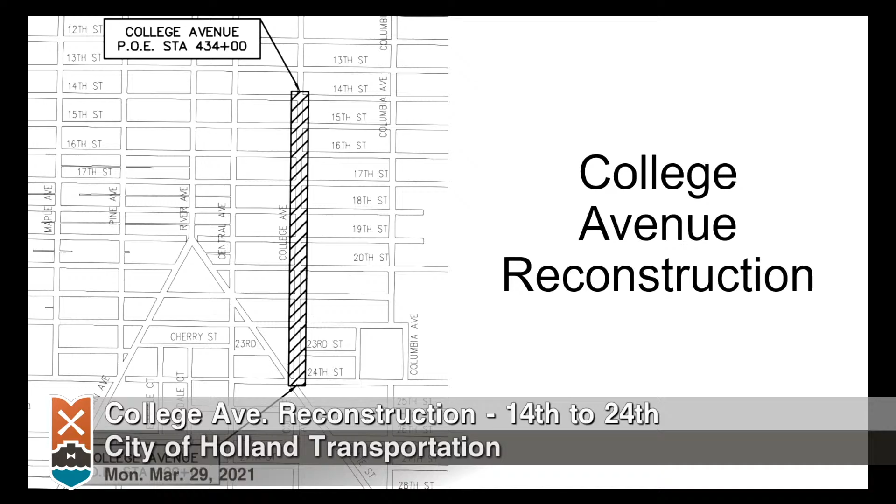So basically our project here is College Avenue. You can see in the PowerPoint, it's from 24th Street up to 14th Street, which is about a 3,400 foot stretch, about 0.6 of a mile. Residential roadway, 25 to 30 mile an hour speed limit, about a 31 foot wide cross section. Hasn't been touched in quite a few years. It's a very tired road. Maybe 20 years, give or take, since the last time it's been overlaid.

And the last time it was overlaid, the gutter pan was overlaid along with it. And the storm sewer, the storm infrastructure on this road is older infrastructure. It's a lot of clay tile, 8-inch, 10-inch, non-reinforced concrete type pipe. It's old stuff. We're going to upgrade it with this project to a much greater extent so that it can handle a lot more water and it'll last a lot longer than so far what it has.

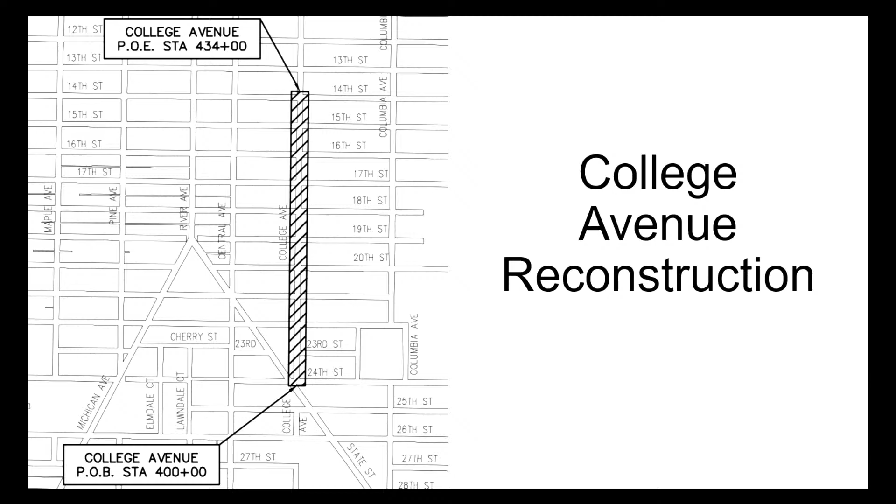Again, my name is Eric Thorne, and I'm a project engineer with the City of Holland.

A lot of things to consider with this project include the project schedule. We're opening bids tomorrow on this project. It's already been bidded, contractors have it in their hands. We will open those tomorrow, pray for low bids, and hopefully a couple weeks, 3 weeks after that, we will hopefully by mid to late April get the project rolling. The project will start, and I'll talk about it more in a minute. It'll go from the north side, 14th Street, south towards 24th Street. It'll be phased in 2 different phases, and I'll get to that in a minute.

Trash pickup during work, we typically implore you to label your trash can with your address so that the contractor, if the road's torn up and needs to pick up your trash can and move it somewhere else for the trash service to handle, can put it back in the right spot. We ask you to label it. You don't have to move it anywhere separate or different, just put it to the end of your driveway, and the contractor will handle that. The way I understand it, north of 18th Street trash pickup day is Monday, south of 18th is Tuesday, and we will coordinate that with the contractor.

And then mail delivery, I believe it's all on foot on College, so that should go uninterrupted.

And then tree removals and replacements, we have had Bartlett, a professional tree service, go through and look at every tree adjacent to College Avenue. They've assessed whether they're in good condition, fair condition, or bad condition, whether they need to come out or not. I have a whole spreadsheet of ages and diameters and the whole nine yards.

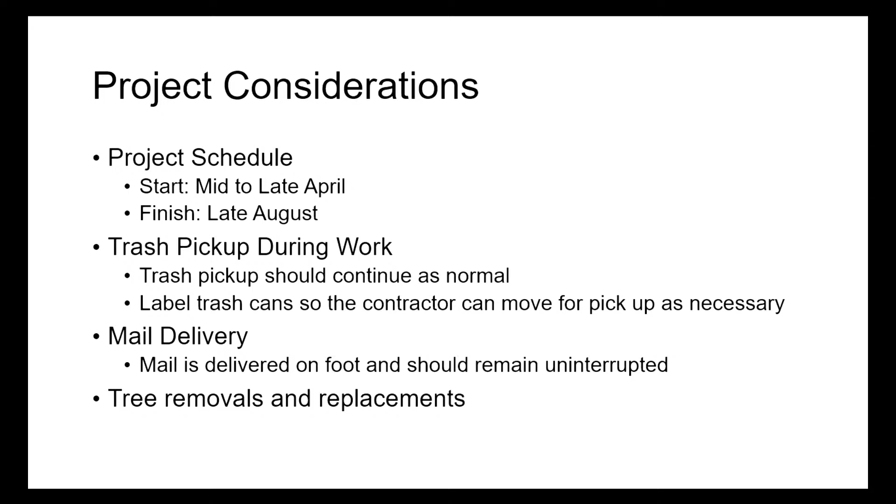So the only trees coming out, if any, as of right now, are trees that are essentially dead or dying. They've all been assessed by this professional, and they're coming out because that's their condition. Most of them, except for maybe one or two, aren't coming out because we want them to or need them to.

They're only going out because they are in very bad condition. So for our phasing here, it'll be completed in 2 phases. The first phase will be from 14th Street down to 19th Street. It's important to note that we are not doing anything inside 16th Street, so it will flow just like it should any other time and will never be closed off. This phase 1 will actually be split into 2 phases: north of 16th and south of 16th.

This should start before 10th Street construction starts. During the first part of 10th Street construction, it's my understanding that the College Avenue intersection at 10th Street will be open anyway, so hopefully this has minimal impact with that project. That is the intention of starting at 14th Street, to get out of the way of that project as soon as possible.

And so for the second phase, the first phase ends at 19th Street. There's a half block, 19th north to 18th and 19th south to 20th Street, that was reconstructed a few years ago and will not be touched with this project. So on 19th Street, you'll be able to flow through - it will not be closed.

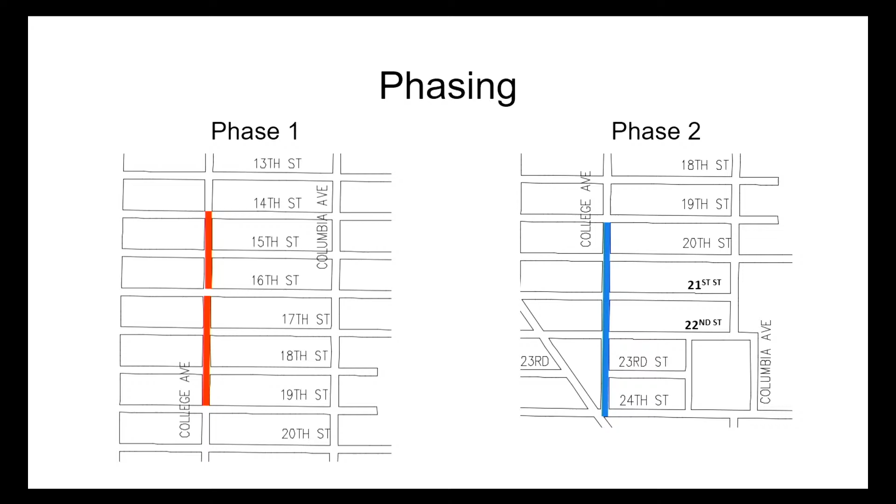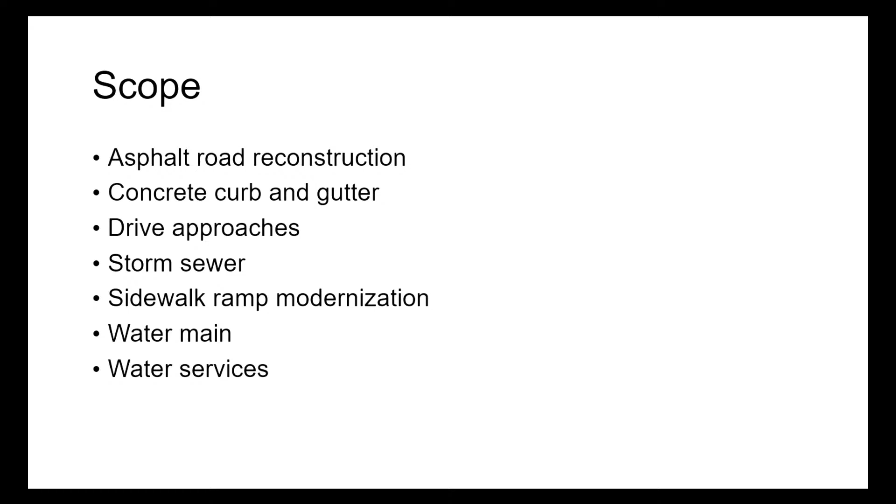So the scope of this project, I think I've touched on it a little bit. It's a full asphalt road reconstruction. You're going to essentially get the same profile cross-section that you have now, about 31 feet wide. But that means the whole road's coming out - the grade, the sub-base is coming out. They're getting all new aggregate base.

New curb and gutter - like I said, the curb and gutter that's there now has been overlaid with asphalt, so that's going to be poured, all new brand new curb and gutter. New drive approaches too - the public side drive approaches from sidewalk to sidewalk adjacent to the road are all going to get ripped out and replaced.

Storm sewer wholesale is going to get redone. There are some spots like around 19th Street that were redone a few years ago that will be tied into with this. 16th Street will be tied into since we won't be doing anything inside it, and we're tying into up by 14th Street - that's all newer reconstruction from the last several years that we'll be tying into.

As part of this, we'll also be doing sidewalk ramp modernization. Basically, a lot of the sidewalk ramps out there are decades old and don't conform to current ADA standards. Current ADA standards require a flat landing for a wheelchair and the detectable warning plate with domes. So all the ones that aren't compliant - which outside of 19th Street and 16th Street, I don't think there are any compliant ones out there right now - those all get redone.

Water main's getting redone, and with the water main comes the water services nowadays, and Mark will talk more about that in a few minutes.

So that storm sewer on the west side of the road is all coming out, and we're putting in an 18-inch centerline main. A lot of the stuff's getting upgraded from 8-inch storm to 18-inch storm, which is quite an upgrade. We're tearing out all the storm structures and putting in new precast concrete storm structures. Some of what's out there now are actually brick structures - it's all old material, falling apart, with patches over the years.

If you look at 23rd, it might be easier to look over here. A lot of this main line storm is going to tie into some of these side streets. Where we're leaving 22nd Street, we're leaving a stub for future expansion. So if we do a similar project on 22nd Street in the future, you won't be stuck with what looks like an 8-inch clay tile storm - we'll replace it with either an 18-inch or 12-inch reinforced concrete pipe. So part of this project isn't just improving College Avenue, it's allowing for improvement on future roads and future projects.

This is just going up the road towards the north. We're leaving stubs again on 21st Street on either side. And under each driveway - this will be a point I emphasize later - we're putting PVC sleeves. So if you have sump pumps or sprinkling lines in the future that need to get under concrete driveways, you're not tearing up your concrete driveway to put those in. That's the goal of putting those under there.

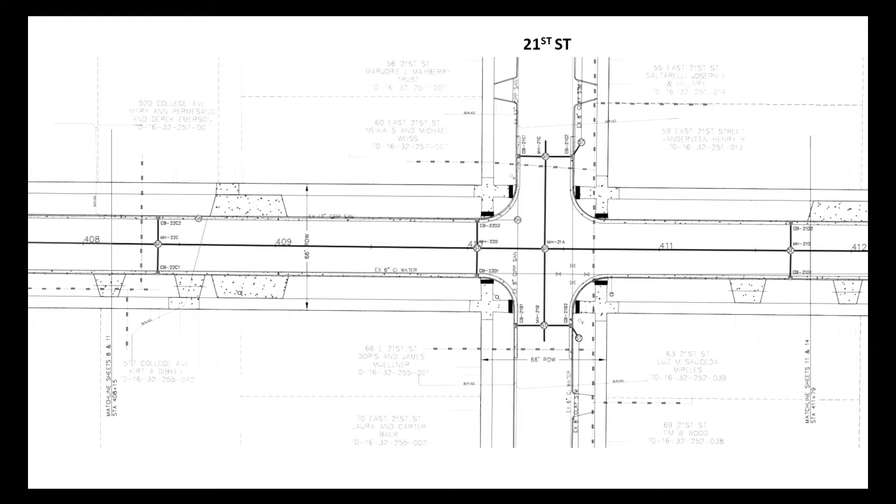If you need to put your sump pump line through there, all sump pump lines need to be connected to the back of a storm structure. They can't do what we call a blind tap - they can't just penetrate straight into the storm sewer. They have to go into an access point, which is a storm structure. The reason we do that is for maintenance. If there's ever an issue with your line, we want to be able to put a camera in it and access it to fix it. It's much easier that way.

It's better, and it's going to do less damage to our own system if it does need repair in the future. So every driveway we put in, and a lot of sidewalk ramps, will have these PVC pipes for sprinkling lines or your sump pump.

Continuing up here to the north, we're at the park on the right side, or the bottom of your screen. More of the same, really - again, not going to get into the minutia.

If you do have questions or want to see something specific, I have a plan set. I'm sitting up here, so I can talk to you afterward. It would make a lot more sense that way.

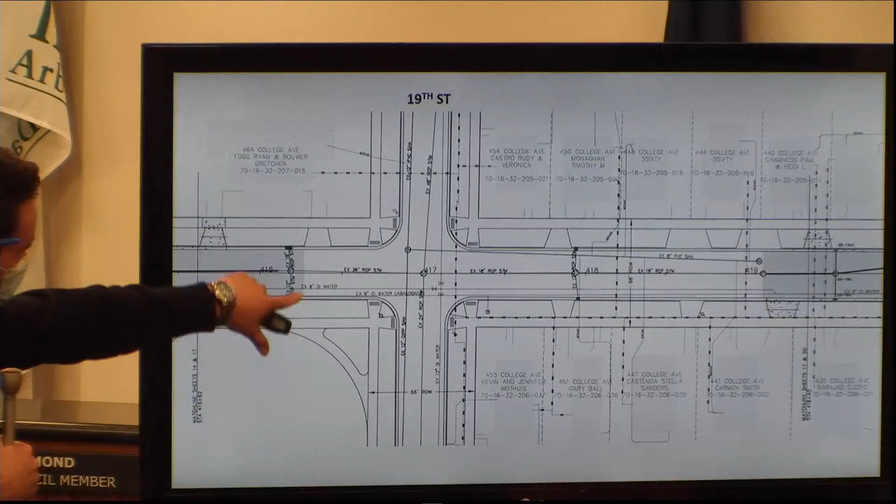Right here is where 19th Street is. You can see the limit right here where there's already existing storm pipe. It started off at 18-inch that we're going to put in. It goes to 24-inch, I believe, at 22nd Street. By the time you get to here, this existing is a 36-inch that we put in a few years ago. A lot of that water goes to the west down 19th. And then where our project picks back up again is going to be just north of 19th, south of 20th Street on College.

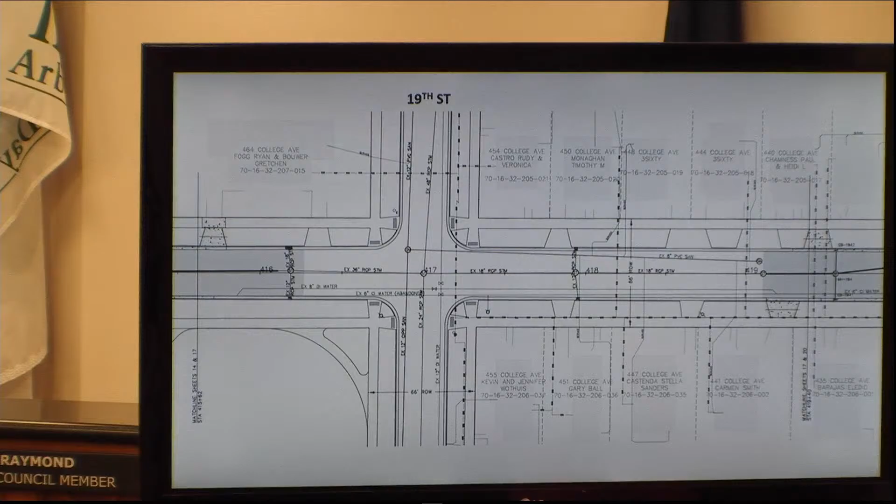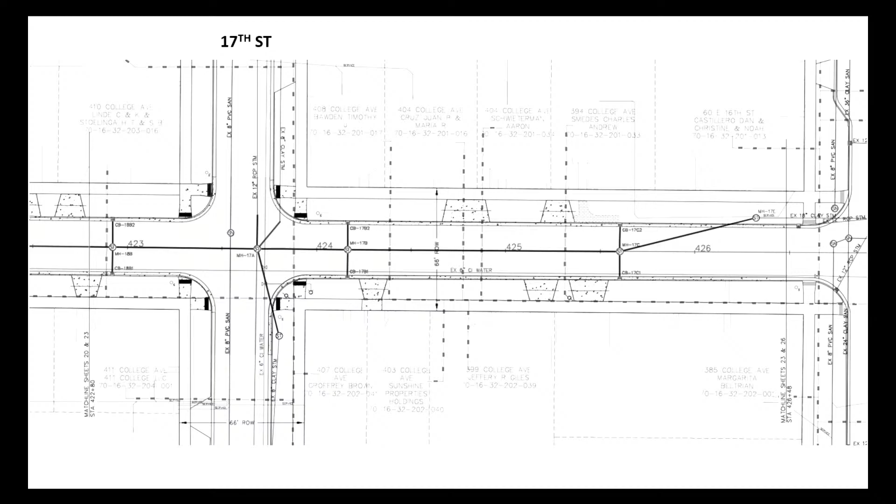And then it continues north, and then you get to 16th Street. You can see it ties into existing storm up here at 16th Street. We're not going to open up 16th Street at all. That was done last year as part of a big project, and those sidewalk ramps were all completed at that time.

And then we're continuing north here, north of 16th Street, 15th to 14th, and that's the terminus of the job right there at 14th Street.

So the cross-section of the road, I mentioned it a couple times, it's about a 31-foot cross-section. I want to say you're gaining a foot because the current curb and gutter, although it's covered, is a half-foot wider on the gutter pan. The new gutter pan is a 1.5 foot gutter pan versus the old one, which was 2 foot. It'll be exposed now, so hopefully it drains water away better than what we had before.

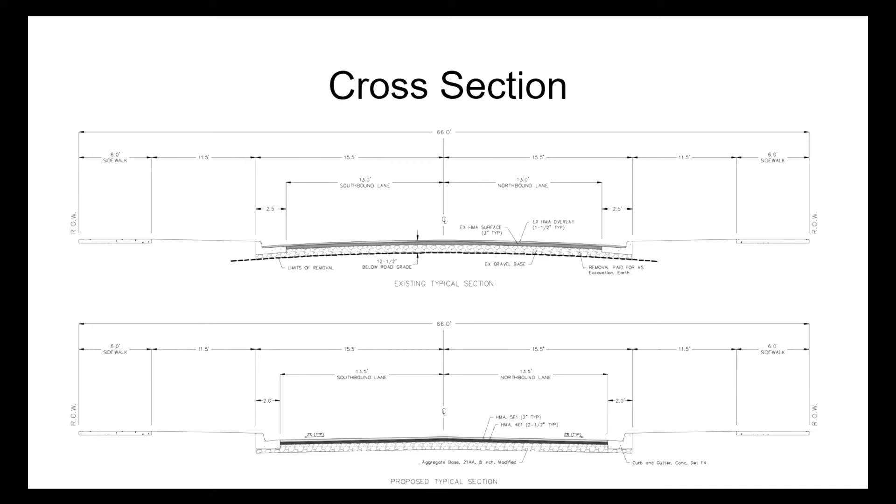And it's going to be the same width. You're still going to have the option, I think in most spots, of parking on both sides of the road. That's not changing. There's no extra bike lane. It's more or less functionally the same thing that it is now.

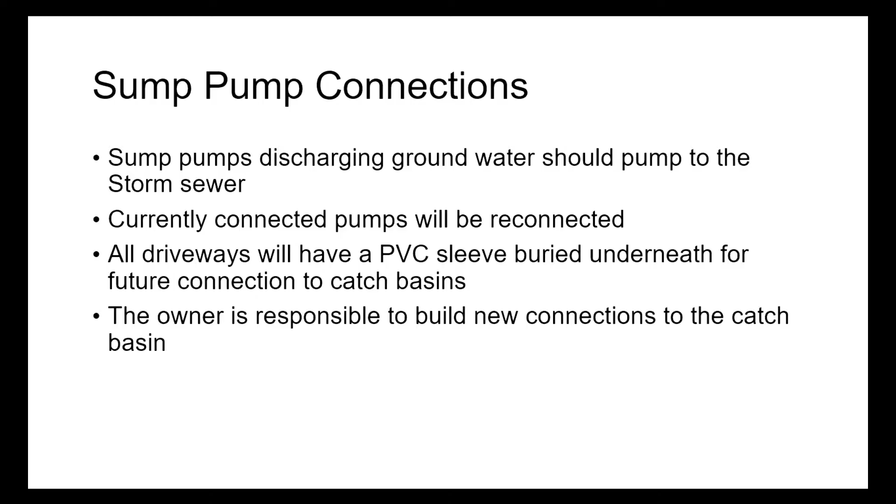So again, sump pumps I mentioned - if you have a sump pump that goes into the storm sewer, that's something you should tell us sooner rather than later. Because like I said, we video the storm sewers, we review those videos, and we try to mark on the plans where there's a sump pump that ties into a structure. But a lot of those, if they're small or if the sewer's in bad shape, are hard to see in the video, and we miss those. That's something we want to get now.

If we do it now as part of this project, on the public side, we cover the cost. In the future, if you want to add a sump pump or tie something in, that's typically an owner expense to plug into a public structure, and it comes with getting a contractor and a right-of-way permit. So it's a lot easier to do it now if you have a sump pump.

You have a question? Yeah, I have someone online who wants to know, do you need to know if they want to do a rain garden in conjunction with the construction?

Rain gardens aren't something we've talked about on this project, and they're kind of new for us to do on any project. I would definitely encourage talking with us about it. I don't have an answer, I guess, so the first place would be to talk to us about it, because it's not something we've planned to do as part of this or to partner with. I think the city's stance right now is that we're open to it, but I don't know about this specific project or how we'd go about handling it. So reach out to us specifically about that. I know on 19th Street it was specifically included in the project - hey, we were doing this, and if you're interested, let us know. That's not the case with this project, but it doesn't necessarily mean it's not something we could do.

And so sprinkling systems - if you have a sprinkling system, I don't know how many there are on College. I think we're fortunate because there are fewer of them on this stretch than on some other projects we've had lately. If you have one, the best thing you can do is tell us, and if you are really good, you can flag it or have your company flag where it is.

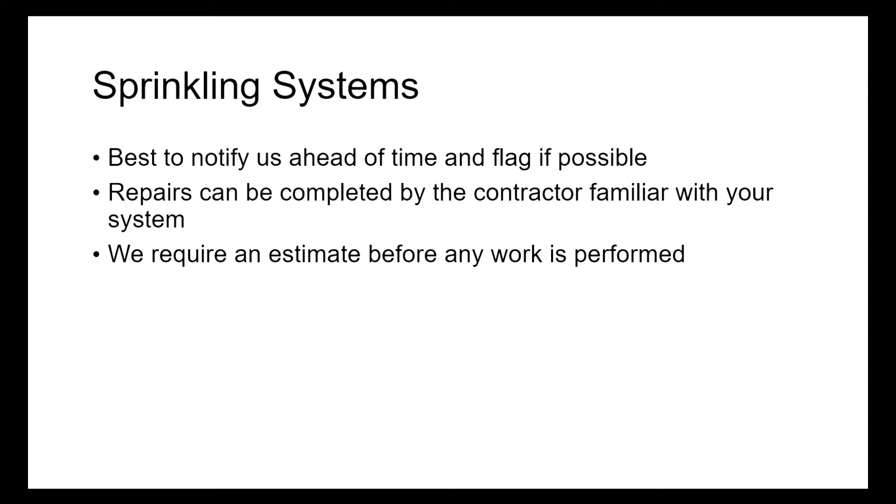That's not the norm. A lot of times what ends up happening is we hit sprinkling systems - maybe even if it's flagged, we hit it. The deal with that, and the way we're taking it on this project, is if you have a sprinkling system and we hit it, we're willing to let your company that's familiar with your system do the work. You've got to, ahead of them doing the work, have them contact us and give us an estimate. I'll work with them.

But we need to see the estimate before they do any kind of work, and before they invoice us. If you don't want to go that route with your own sprinkling company, we can always have a company of our own come through and do it. But I would encourage, if you experience issues with your system after we've been through it, to have your own company do it. I think that's the best way to do it.

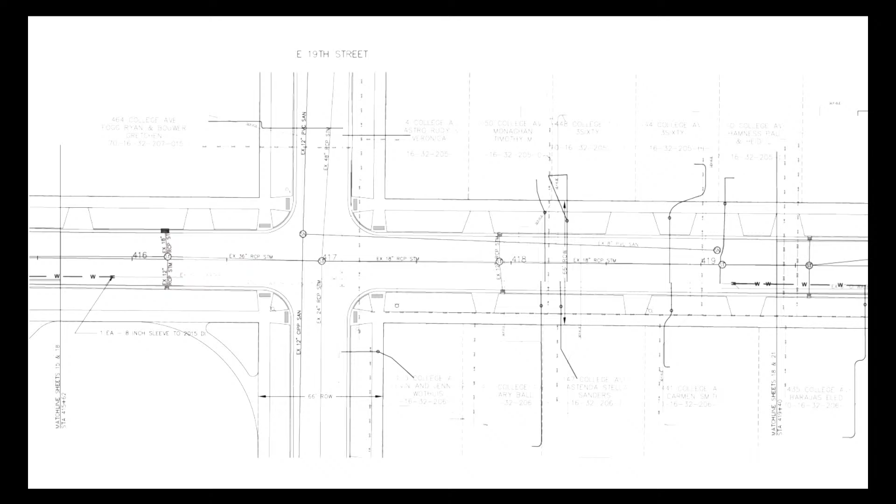Some of the things you might see - we do replace the hydrants and the stuff that you see in the road. They move a little bit because we have to place a new one while the old one's in service, but they generally end up back in about the same spot. So if there's one out at the corner by the stop sign, it might move one way or the other a few feet, but it'll stay in generally the same area.

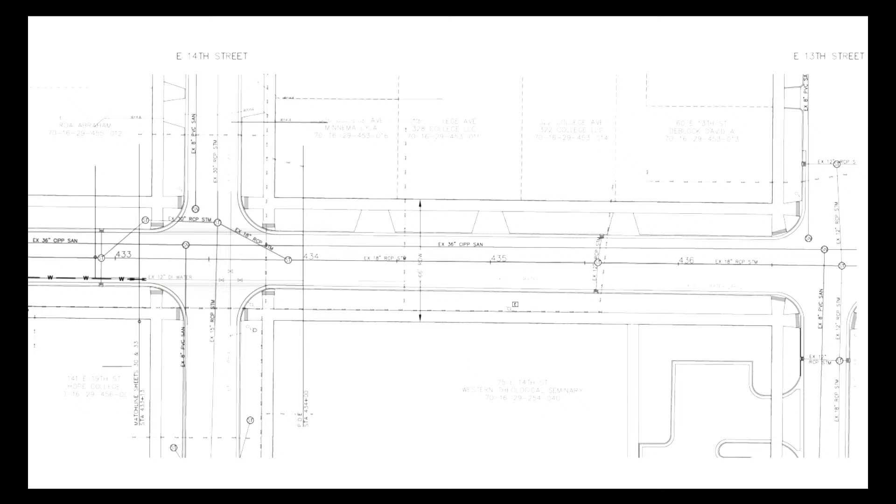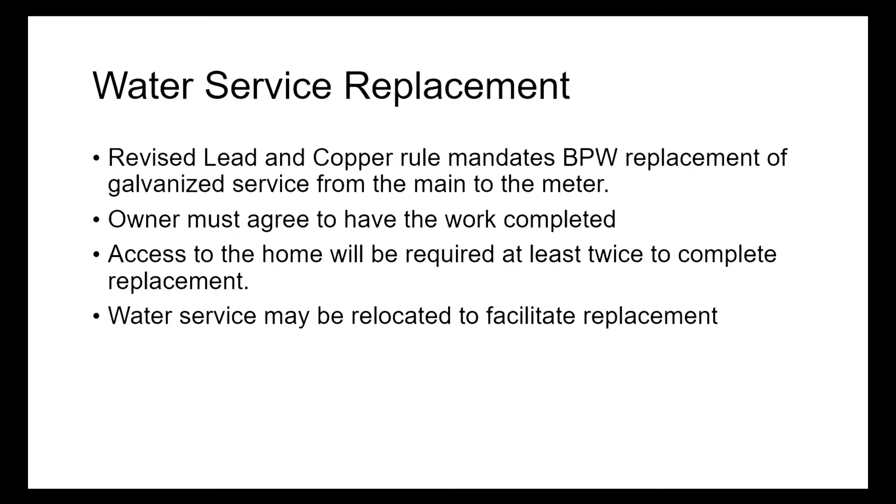The fun one that everybody gets to deal with is the water service replacements. In relation to the Flint water crisis - here in the city, we have not had any of the issues that they've had at Flint - but there was a state law change so that when I replace water main, I now have to replace all water service components that were at some point connected to a lead-containing component.

In the city of Holland, that is the old gooseneck tap at the water main. It was a little kind of lead pewter fitting. That was how they tapped the water main and connected the steel water services to the water main.

So I've reached out to all the homeowners and residents already on this project that are candidates for the water service replacement. If you haven't replied to that, please do. This is free of charge per the state law.

We use a trenchless technology. We drill in a new water service, and then we have a professional plumber do the work inside your home to connect the plumbing to the new water service.

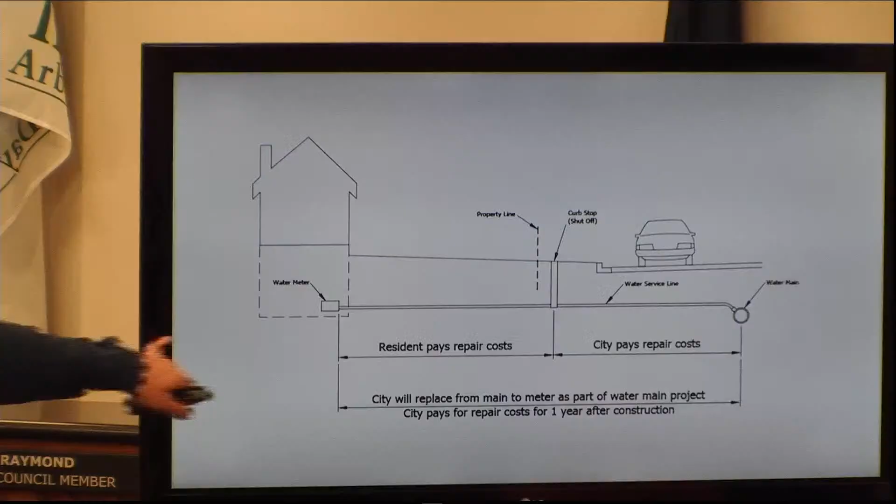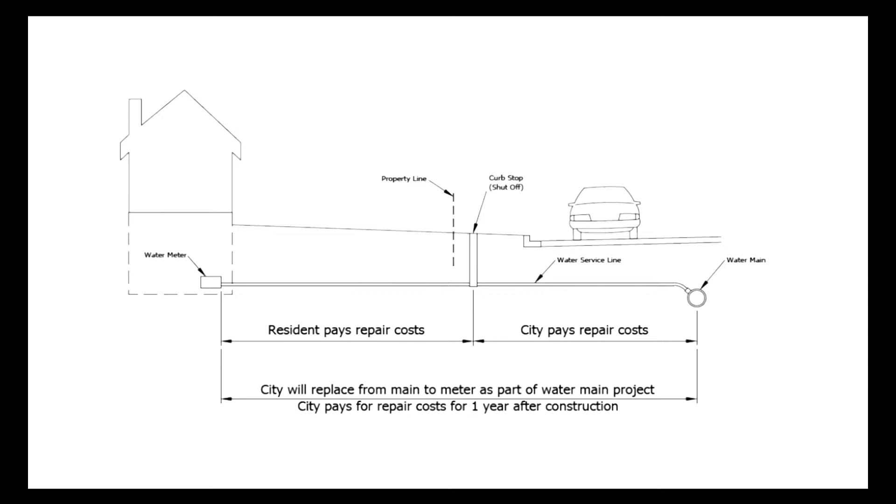And so this water service replacement is focusing on this area between the house and the road. Normally, before that change in state law, that work was not completed as part of this project. Now it is, when this is galvanized steel - kind of that same thing. This is the focus of that water service replacement work.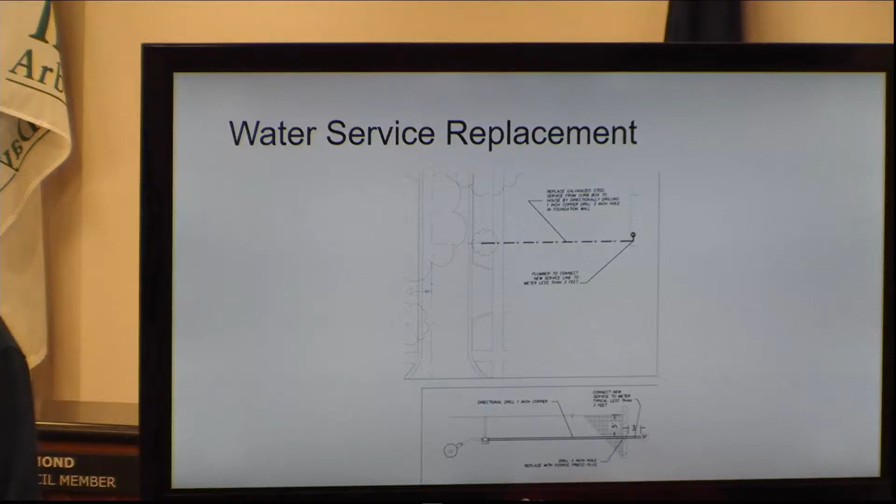Every day, John will be on site in a Holland Engineering truck. You can go knock on his door, wave at him. I've always found John to be a very nice, approachable guy. Just tell him your complaints, your concerns, questions, and we'll get you answered as best we can. If you can't find John, usually Eric, myself, or another BPW employee will also probably be on site at various times, so feel free to wave us down and tell us what's going on.

Feel free to call us and tell us what's going on. We might not know exactly what you're going through, so we won't know unless you tell us, and then we can help you find answers, like where did my trash can go? Well, we picked them up this morning and we've had them get placed at the wrong houses. That's why we ask you to label them, but we track them down, find all that fun stuff. So we don't know if you're having a problem if you don't tell us. That's a good thought.

Some things to expect: we tell the contractor that residents with driveways fronting on the job should be able to get in and out of their house every day. So that means you get to leave for work, and then when you come back...